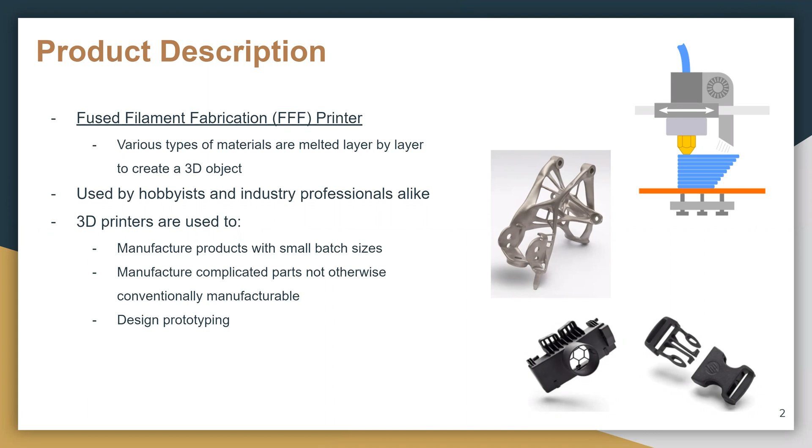3D printers are used by hobbyists and industry professionals to manufacture products with small batch sizes, design prototyping, and complicated parts. We chose to analyze a simpler and cheaper 3D printer that uses T-slots with rollers to move in the X, Y, and Z axis.

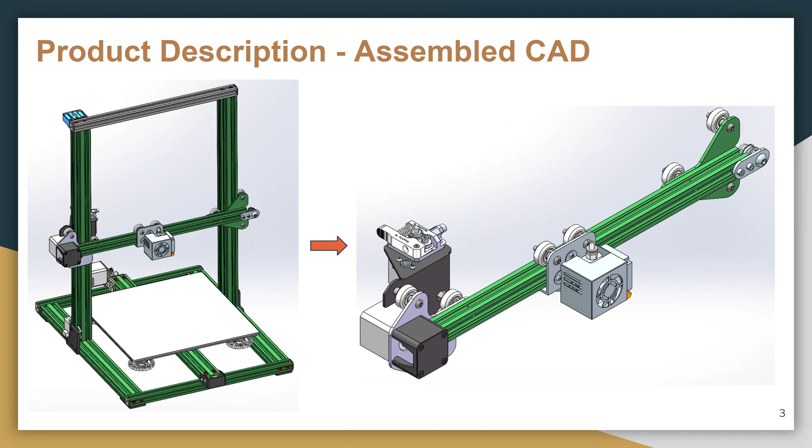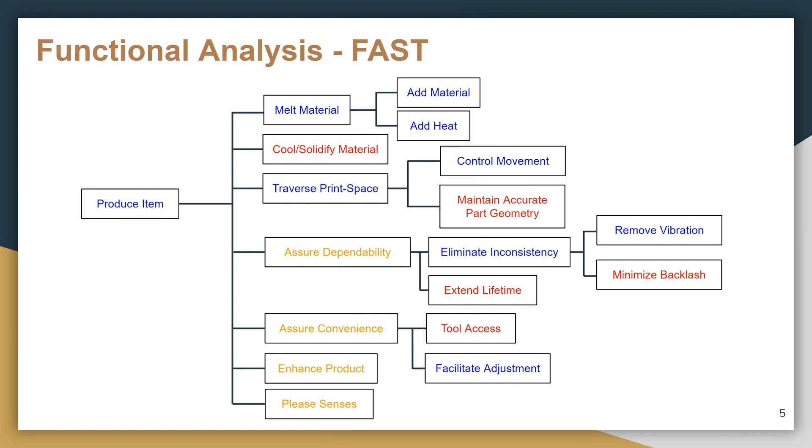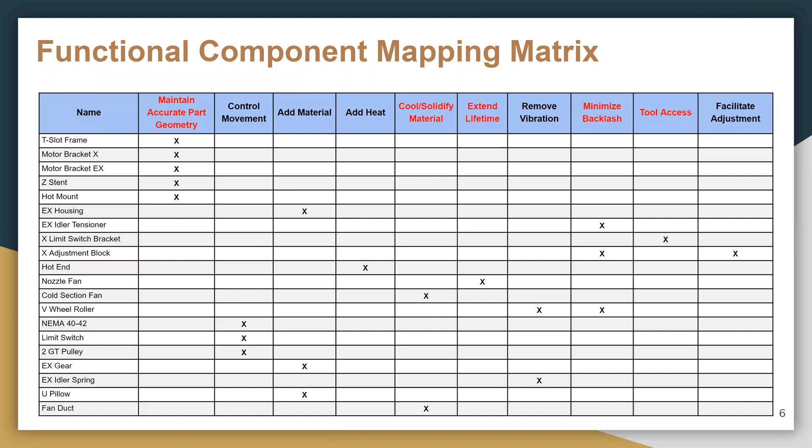As you can see in the functional component mapping matrix, the actual functions have stayed relatively the same for each part. However, changing these titles has made it more obvious what their performance and role in our part is. The quad chart classification has been adjusted to better fit a classical quad chart setup, and the fan cover has moved from keep-as-is to redesign with DfMA.

A lot of the keep-as-is parts are purchased components and therefore cannot be easily changed during our DfMA, and the DfMA parts have been selected as primarily functional or structural components, which are more easily and readily redesignable by us.

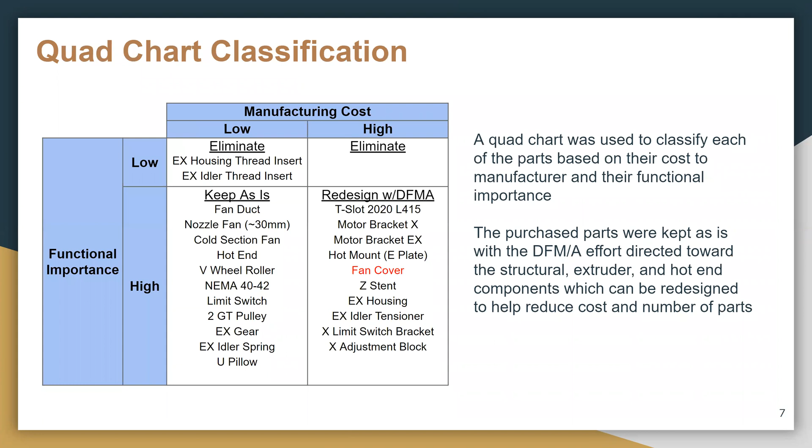Most functions from the FAST are the same for both the primary and secondary groups, except for melting material, vibration removal, and maintain accurate part geometry.

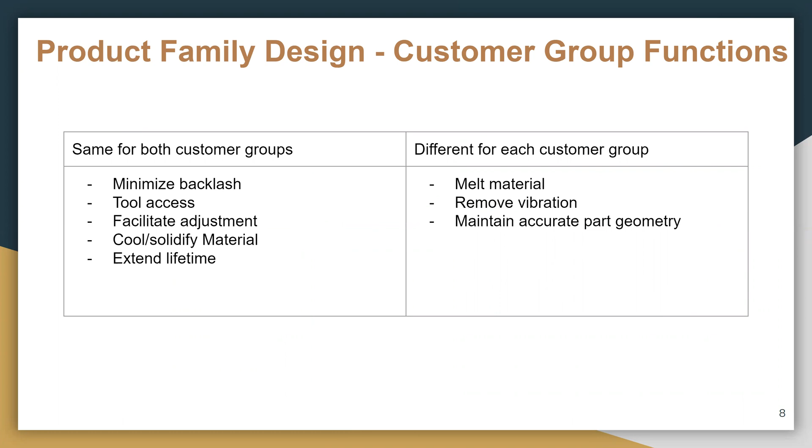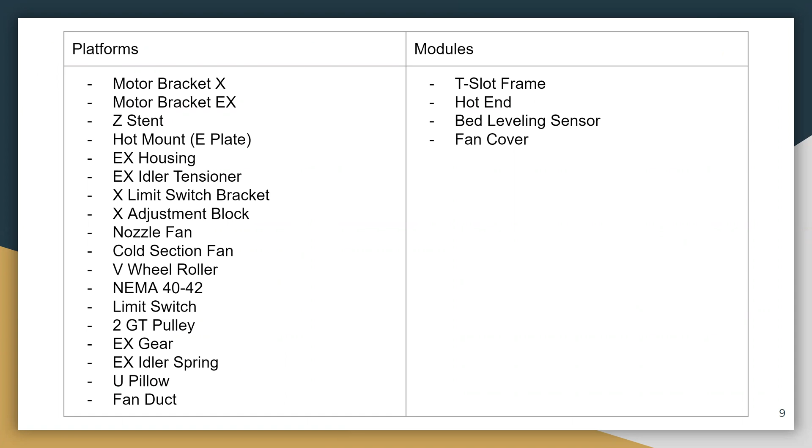All the parts that correlate with the customer group functions are listed on this slide, with the T-slot frame, hot end, bed leveling sensor, and fan cover being modular.

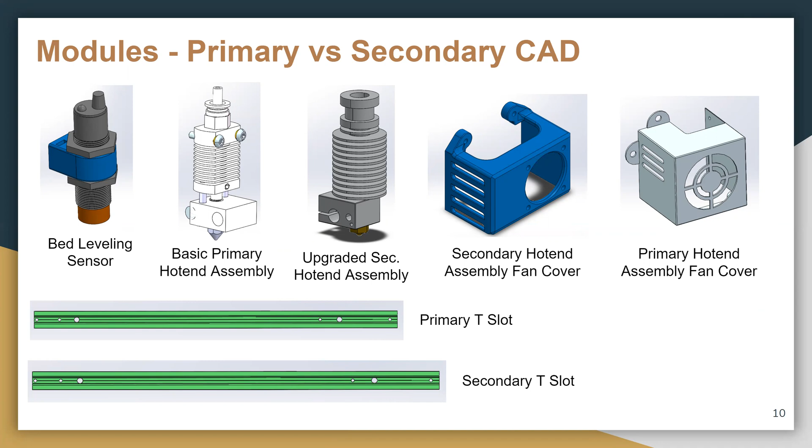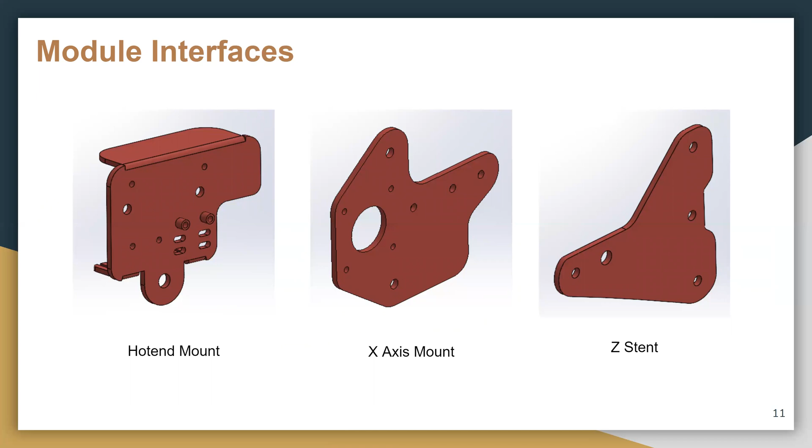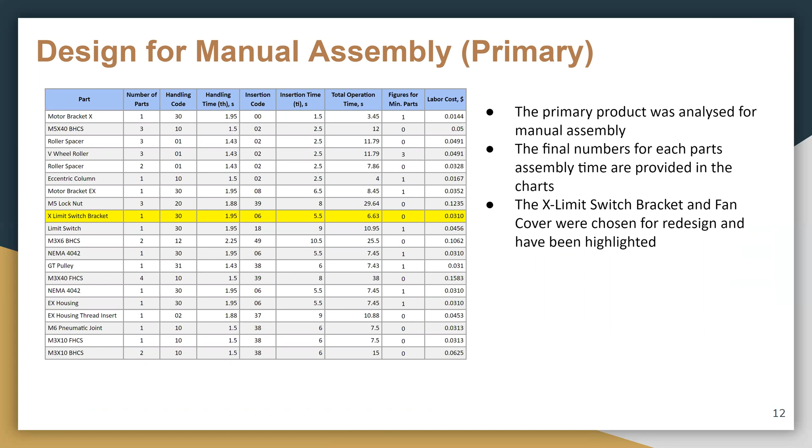The next one: many of the parts here are actually fasteners, which could be eliminated and do not count towards the total minimum number of parts. Many of these have to do with the V-rollers.

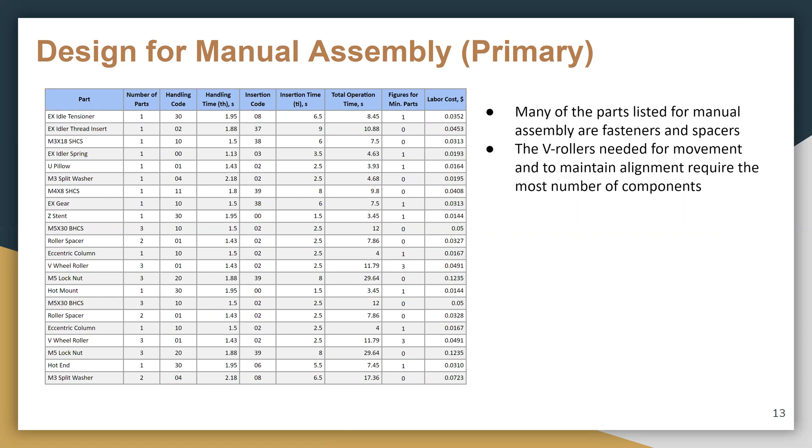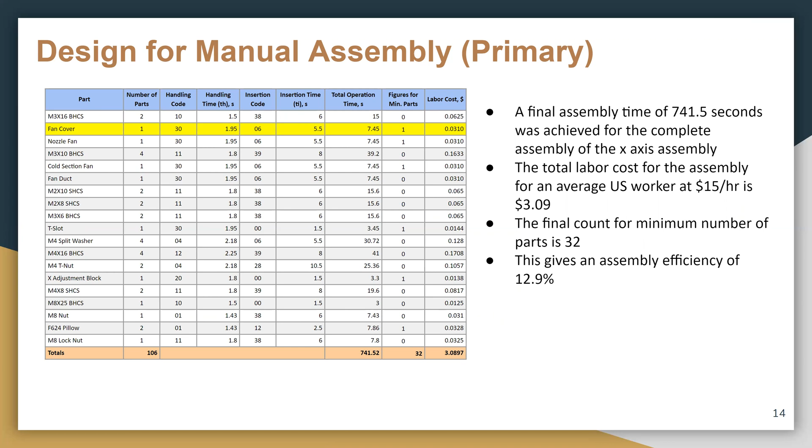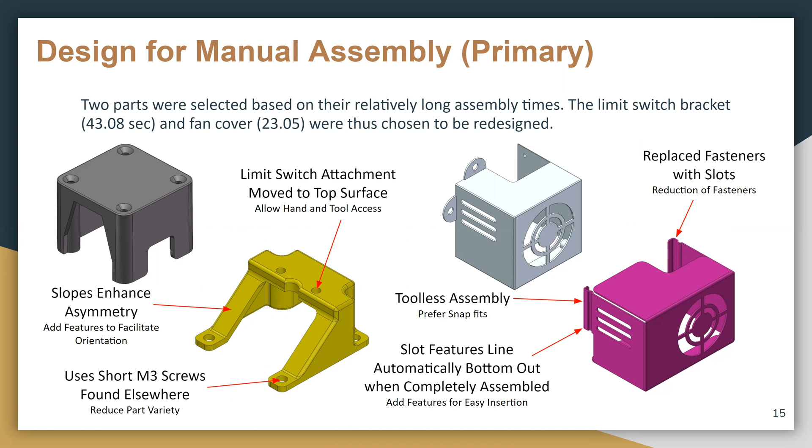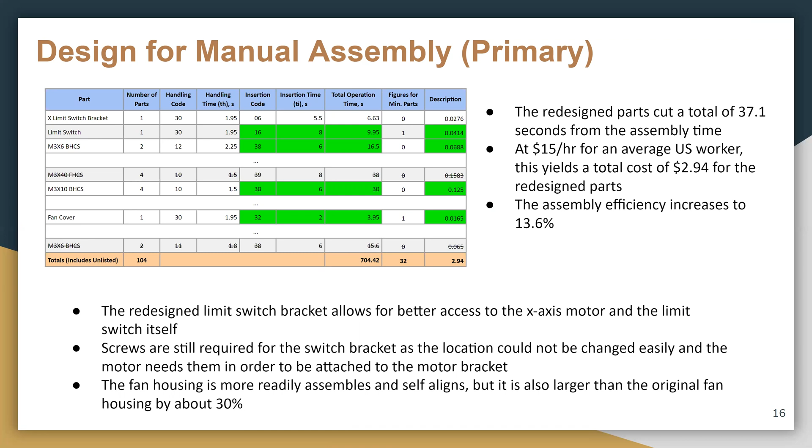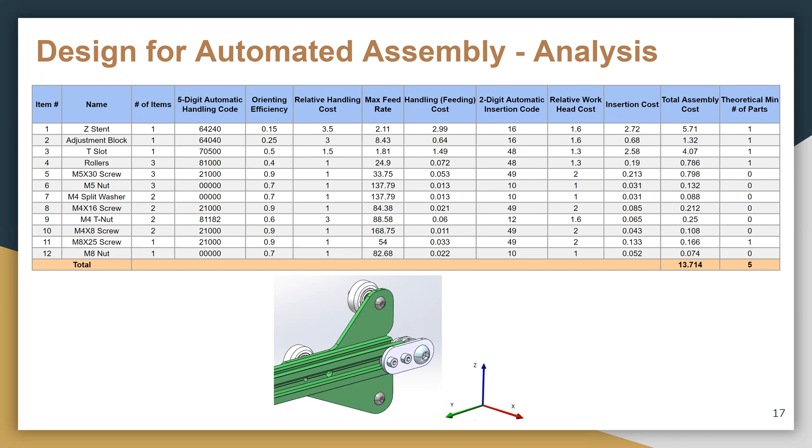The total automated assembly price came out to be $13.71, and most of the cost was due to its high handling and insertion cost, primarily because of the non-vertical assembly.

On this slide, you can see the exploded views for both the before and after redesign. We followed design for automated assembly guidelines 1, 2, 5, 7, and 12. We added flanges to facilitate orientation, as well as to deter overlap during feeding, and we also removed most of the unnecessary screws.

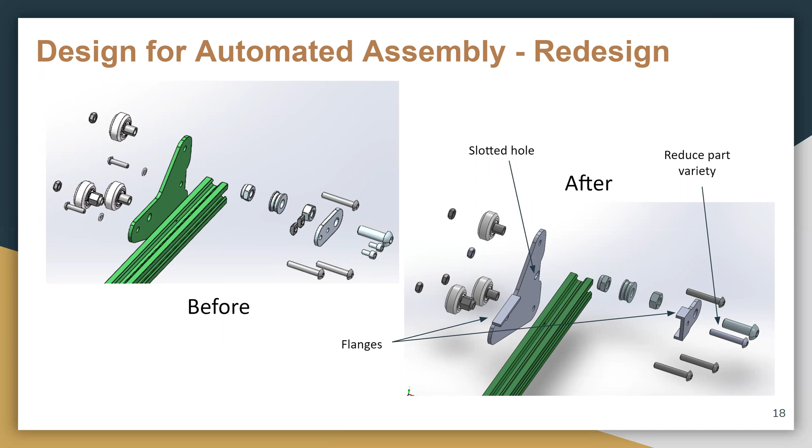Now all the fasteners are on one side, so Z assembly is made possible. In this slide, you can see the more detailed breakdown of the analysis with the total part cost coming to $6.10.

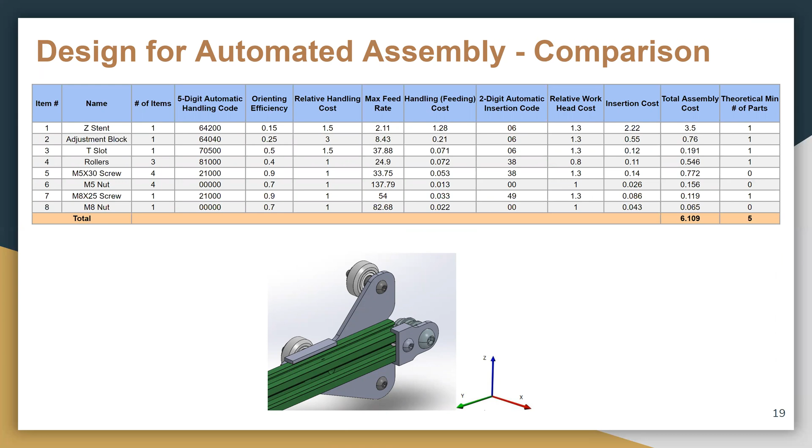For the first part, we redesigned the Z Stent with reference to the function component mapping matrix, the part that was crucial to maintain part geometry of the whole system. The most critical dimensions were the diameter of the holes and the thickness of the Z Stent.

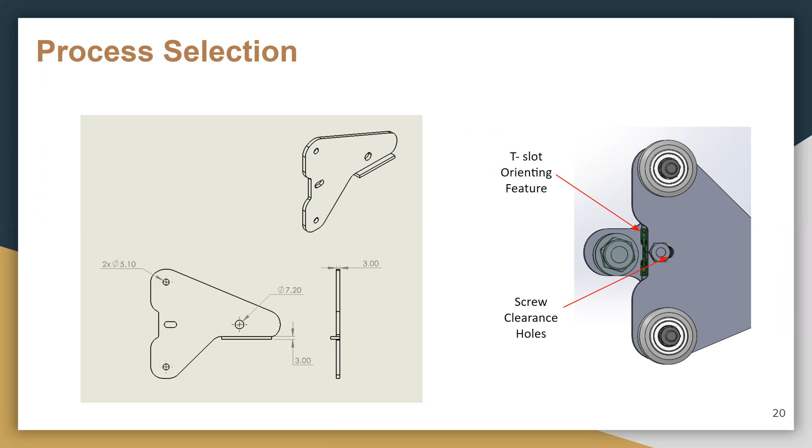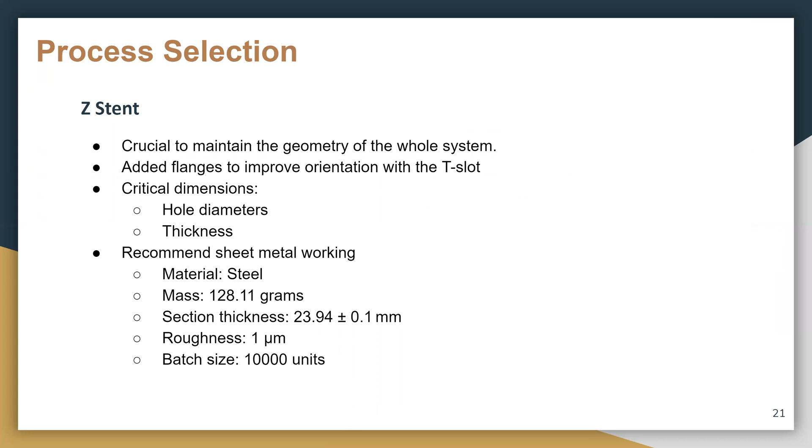We picked steel as a material with flat or folded sheet with a mass of 128.11 grams, section thickness of 23.94 mm, and a tolerance of 0.1 mm, and roughness of 1 micrometer with a batch size of 10,000 units. The recommended process of making this part was sheet metal working.

The second part that was redesigned was the limit switch bracket with reference to the function component mapping matrix. The bracket is essential to give tool access to the limit switch and make it secure. The most important dimensions were the thickness of the slopes, the thickness of the whole system, and the diameter of the holes.

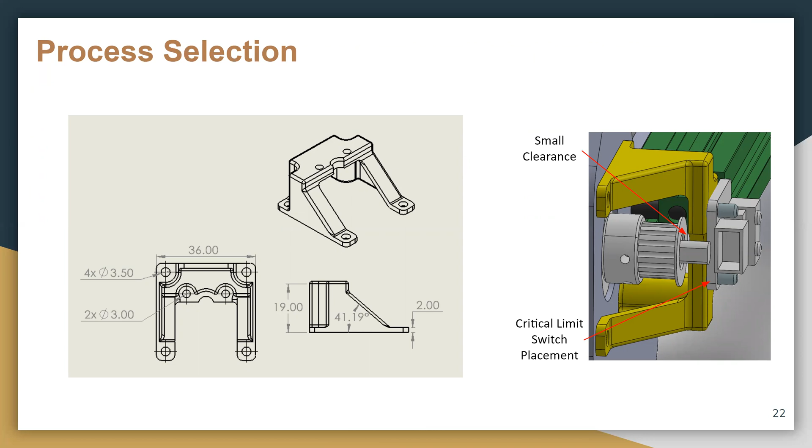We picked ABS as a material with the shape of a modified prismatic non-circular part with a mass of 4.02 grams with a tolerance of 0.1 mm, section thickness of 19 mm, and roughness of 1 micrometer, and batch size of 10,000 units. The recommended process was injection molding.

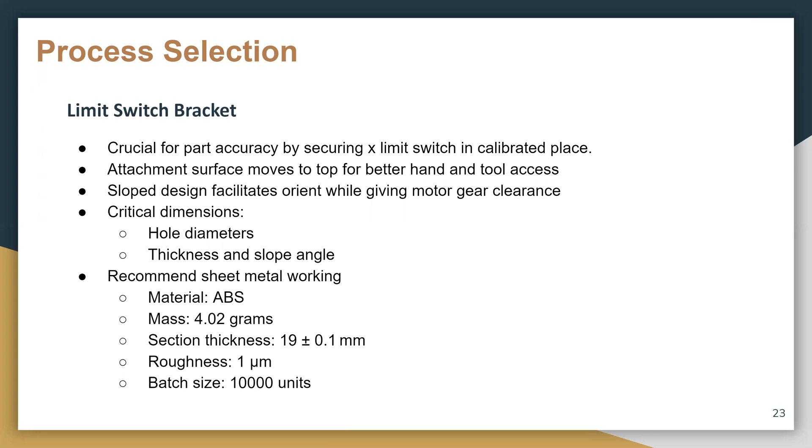For the injection molding design for manufacturing analysis, we chose the X limit switch, which before was housing the X limit switch inside, which required expensive ribbing and bosses. The total manufacturing cost came out to be $5.11 because of that.

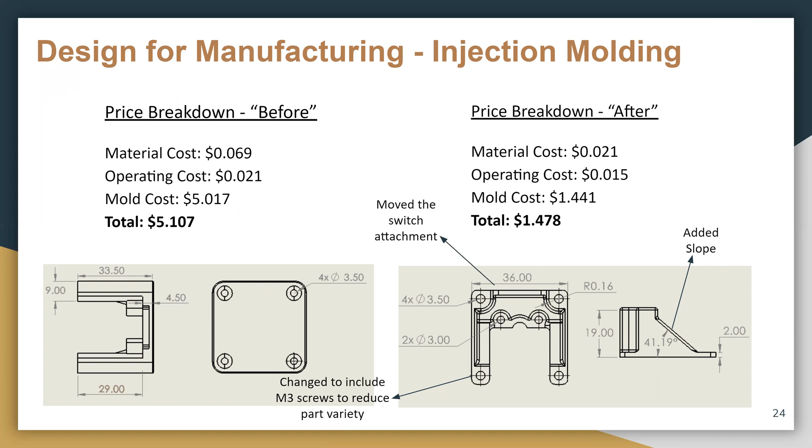So utilizing DfM 1, 2, 4, 6, 7, and 8, we redesigned as explained before, which totaled to $1.48. For the sheet metal, we chose the Z-stand to redesign, and before the cost came out to be 62 cents.

Utilizing DfSM 5, 6, 7, 8, and 11, we redesigned the part, which resulted in a slight increase in price that totals to 72 cents.

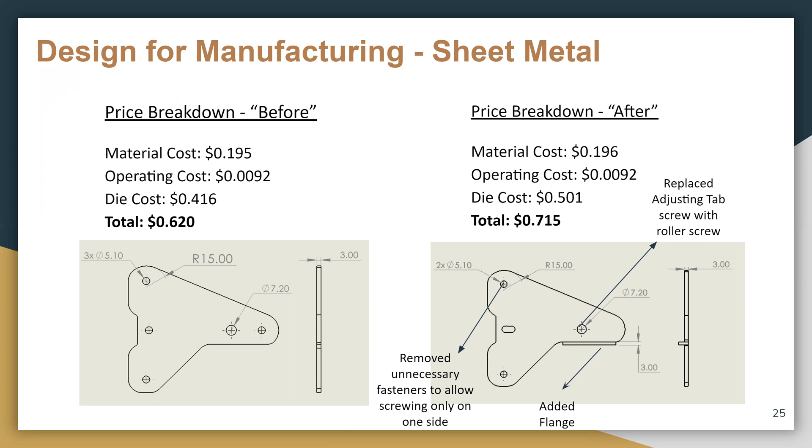After submitting a Hubs quote and extrapolating price for 10,000 units, we noticed an average of 70% difference in price when compared to the analytical method. This is because when doing the analytical method, we simplified the geometry of the part to more easily find the area, which directly impacted the cost.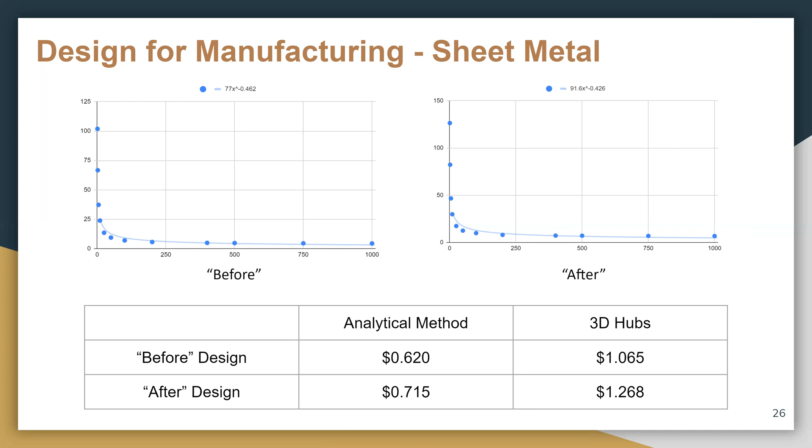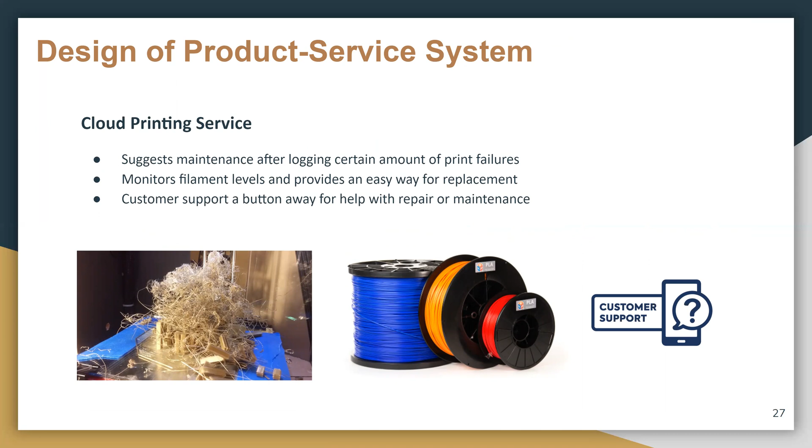For the design of product-service system, we suggest a cloud printing service that flags maintenance after logging a certain amount of print failures. It monitors filament levels and provides an easier process for replacement, and a customer support button which helps with repair or maintenance.

The customer experience benefits with this are it promotes product longevity, it makes printer repair easier, and it streamlines printer functionality. The environmental impact is that it promotes printer repair versus replacement.

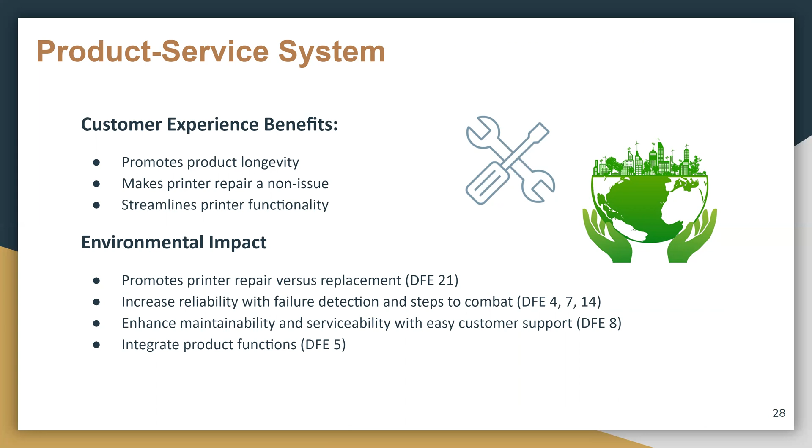It increases reliability with failure detection and steps to combat it. It enhances maintainability and serviceability with easy customer support, and it integrates product functions.

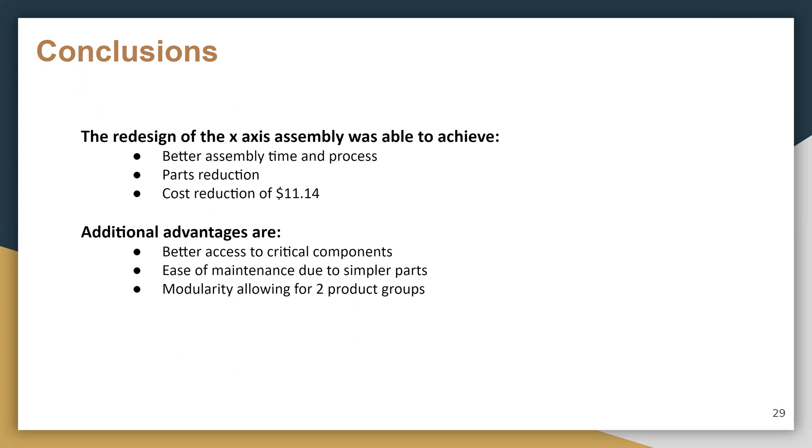The overall redesign of the X-axis assembly was able to achieve a better assembly time and a more streamlined assembly process, a complete parts reduction of several screws, and a cost reduction of $11.14. Additional benefits are better access to critical areas, ease of maintenance, and modularity allowing for 2 distinct product groups.

Disadvantages are that components could have been further simplified; however, this would require an overhaul of almost the entire system as many of the parts interact. The use of V-rollers should have also been eliminated, as they required many parts to put together, but they could not be completely removed.

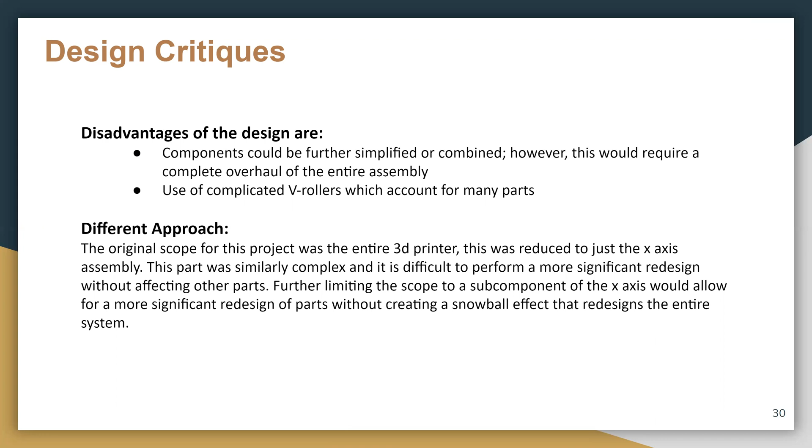A different approach would have been to take a much smaller portion of the X-axis assembly, such as the extruder or the hot end specifically, which would have had fewer parts and would not have had the snowball effect of creating more redesigns. That concludes our presentation.